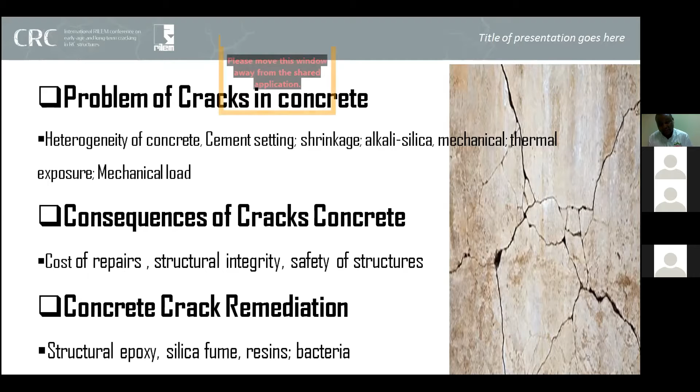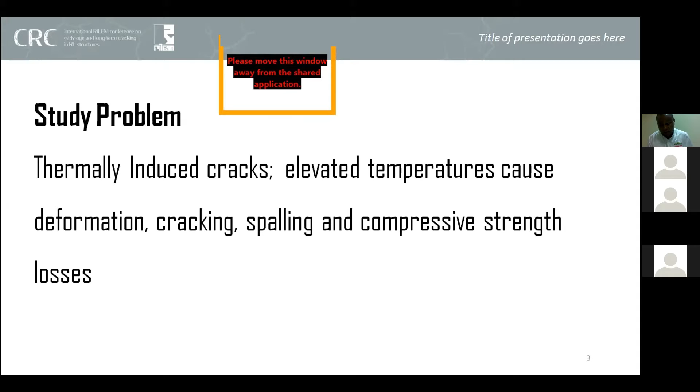Basically, we introduced the cracks by exposing the material to elevated temperatures of 1000 degrees Celsius. When any material is exposed to these temperatures, there is deformation, cracking, spalling, and even strength loss. In a structure, the structural integrity of the building is compromised, and in the worst case it can lead to collapse.

The approach that I took in the study is I focused on using the newly developed limestone calcined clay cement, and the commercial Portland cement as the control cement. Mortar prisms were made using both cements at a water to cement ratio of 0.5. They were cured for 28 days. Half of the 28-day cured mortar prisms were thermally degraded by heating them at 1000 degrees Celsius in a furnace to induce the cracks, while the other half was used as a control.

Both cracked and uncracked mortar prisms were subjected to compressive strength, porosity, and accelerated chloride ingress tests. In addition, half of the cracked and uncracked mortars were immersed in a bacterial solution containing Bacillus subtilis, while the other half was immersed in curing water until the 90th day. Compressive strength, porosity, and chloride ingress were repeated on the 90th day. Microstructural changes in cracked LC3, that is limestone calcined clay cement mortars, were examined using a scanning electron microscope before and after immersion in bacterial solution.

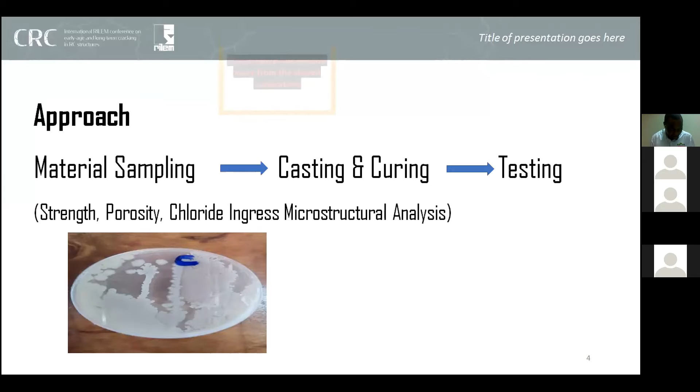The image that we see here is one of the images that we obtained in the lab when using Bacillus subtilis. You find that the bacteria is motile, as you see in the image.

We noticed from the study that for compressive strength at 28 days of curing, uncracked mortars exhibited higher compressive strength. The C is for cracked, while the UC is for the uncracked mortars. The cracked mortars showed lower compressive strength at 28 days, while the uncracked mortars showed higher compressive strength. That shows that the cracks actually result in reduction in compressive strength.

Again, when the mortars were immersed in water, the cracked ones again showed lower compressive strength, while the uncracked showed higher compressive strength when cured in water, and this is attributed to autogenous healing of the mortars due to residual cement that hydrated, and when hydrating, it could have resulted in gain of strength.

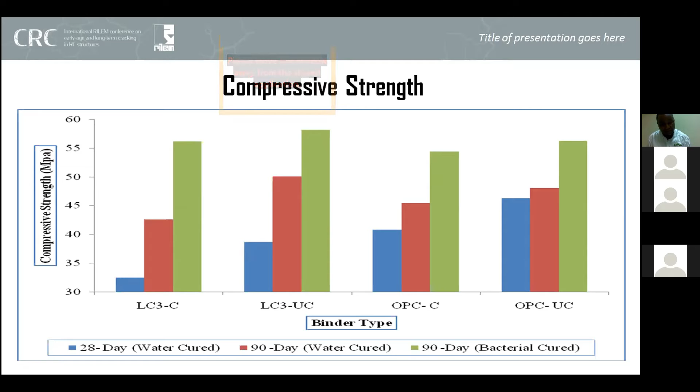From the study, it was interesting to note that LC3 was not much affected by the presence of cracks, and this can be attributed to the presence of limestone, which acted as a filler material in the mortar matrix. On porosity, it was evident that after 28 days of curing, the uncracked mortars exhibited higher.

The uncracked exhibited lower porosity, while the cracked one exhibited higher porosity. This can be attributed to the fact that when cracks appear in concrete, the cracks form pathways for ingress of materials such as water, or they become the pathways for water to penetrate into the concrete, and therefore the material becomes quite porous due to increased permeability.

After 90 days of curing in water, the material became less porous, and again, this can be attributed to the fact that the material was gaining more strength with time due to the hydration of the residual material that could still not have hydrated at 28 days, and therefore water could have caused the residual cement to hydrate, and therefore there was a gain of strength.

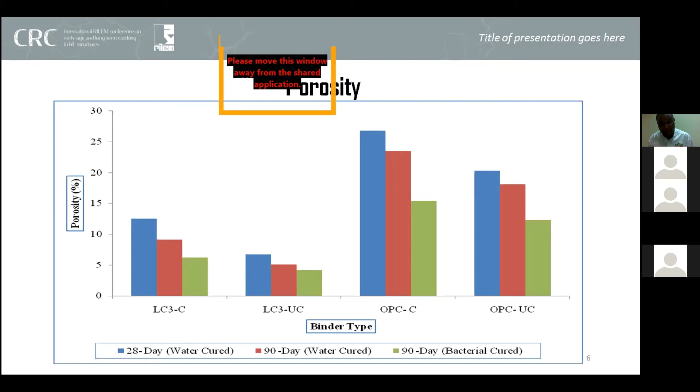So from this study, it is clear that the uncracked prisms showed lower porosity, while the cracked samples had higher porosity. On the other hand, the samples which were cured in water had higher porosity as compared to the samples which were cured in bacterial solution. And the difference can be attributed to the fact that in bacterial solution, we have got precipitation of calcium carbonate from the bacteria, and therefore it results in sealing of the cracks. And when the cracks are sealed, the material becomes less porous.

For the chloride ingress test that was conducted, the mortar prisms were cast and subjected to accelerated chloride ingress. After the exposure to the chloride media, the mortar prisms were sliced into portions of 1 millimeter each, and the amount of chloride in each piece of mortar was analyzed, and the chloride profile was made using Fick's second law. One of the error function fitting curves that was obtained is what we see in the graph here. The apparent diffusion coefficients that were obtained from different samples are shown on the table here.

At 28 days of curing, the limestone calcined clay which was cracked showed higher apparent diffusion coefficient, while the one which was uncracked showed lower chloride diffusion. And the difference can be attributed to the fact that when cracks are present, the cracks form pathways for ingress of chlorides. In the case of OPC, we find that OPC with the cracks showed higher apparent diffusion coefficient than the one which did not have the cracks.

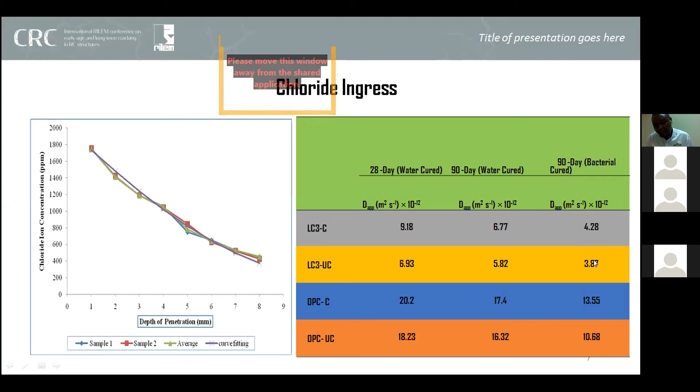Generally, it was observed that in both cracked and uncracked mortars, when the bacteria solution was used, there was no significant difference in terms of apparent diffusion coefficient, and this shows that the bacteria is quite good or efficient in terms of healing the cracks.

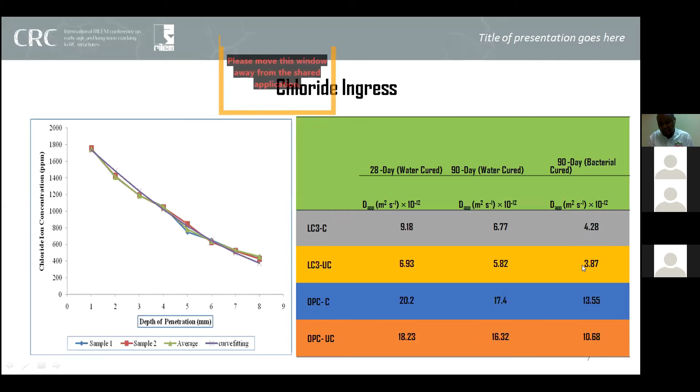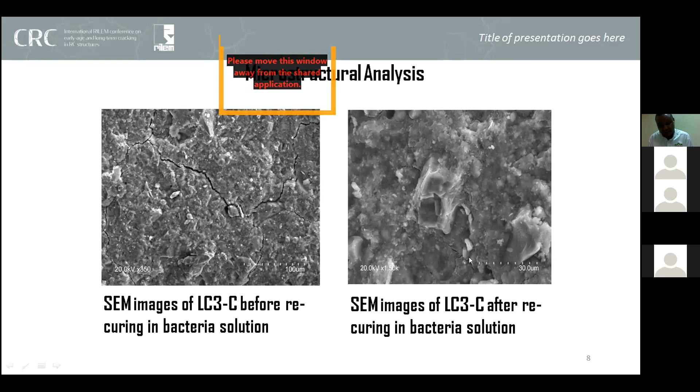When microstructural studies were conducted, in the first image we took one sample of limestone calcined clay which had cracks, and the cracks were quite visible using a scanning electron microscope. After the samples were immersed in a bacteria curing solution, there was a degree of crack healing, and it was quite clear that the cracks in terms of their sizes were greatly reduced after 90 days. And this shows that there was some deposition of calcium carbonate visible due to the bacteria precipitation process.

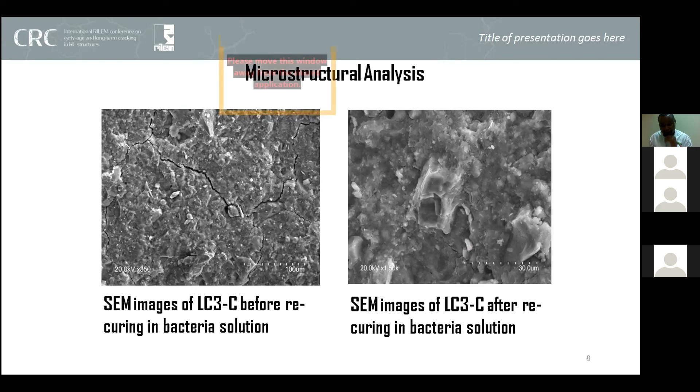Excuse me, so maybe we can conclude quickly, to respect the time. Thank you. Okay, thank you.

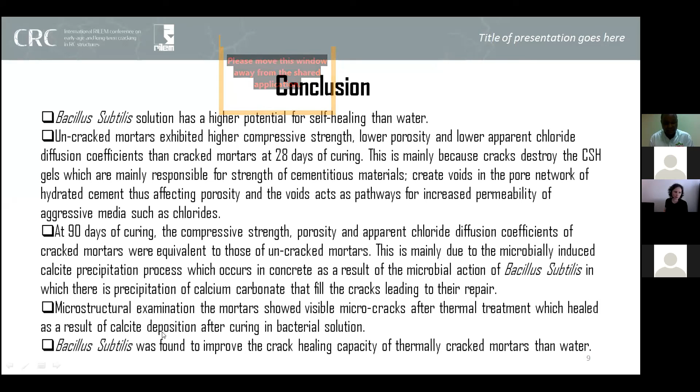At 90 days of curing, the apparent diffusion coefficients were equivalent to those of uncracked, and this is mainly due to microbial action. The microstructural examination of mortars showed visible cracks from the thermal treatment, which healed as a result of calcite deposition after curing in bacterial solution. And lastly, Bacillus subtilis was found to improve the crack healing capacity of thermally cracked mortars more than water.